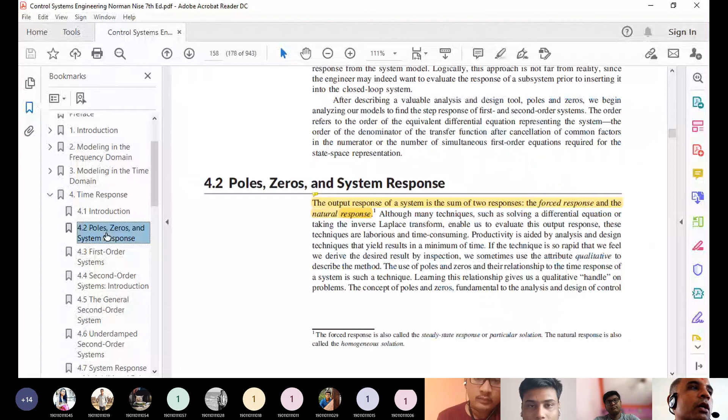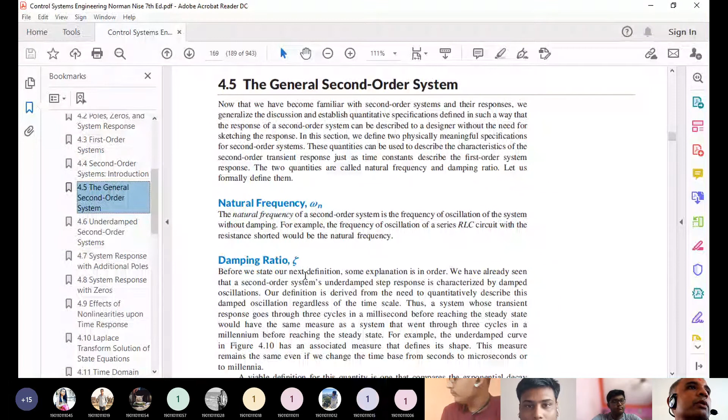Okay. So in the first internal we ended with the type order of the control system, poles and zeros. So now onwards, in the second mid-sem exam, that is first order system, second order system parameters, that are the natural frequency of oscillation, damping ratio, rise time, peak time, maximum overshoot, settling time, all the parameters. Then underdamped system response, the effect of addition of poles and zeros.

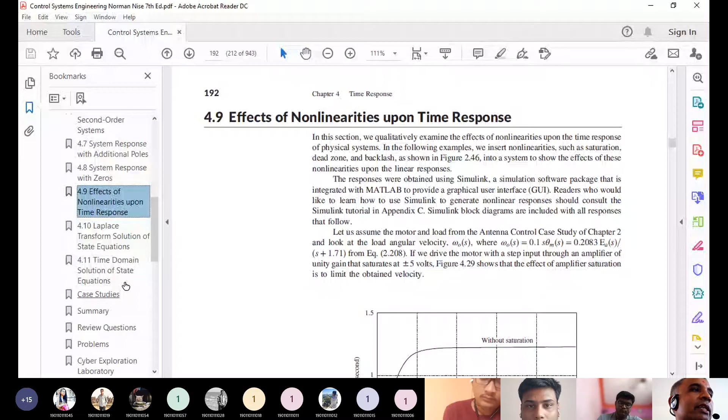Okay, of course 4.9, that is non-linearity, is not covered. The state space equation is still left. So 4.10 and 4.11 are not in your course at present. I hope in laboratory the state space is already covered.

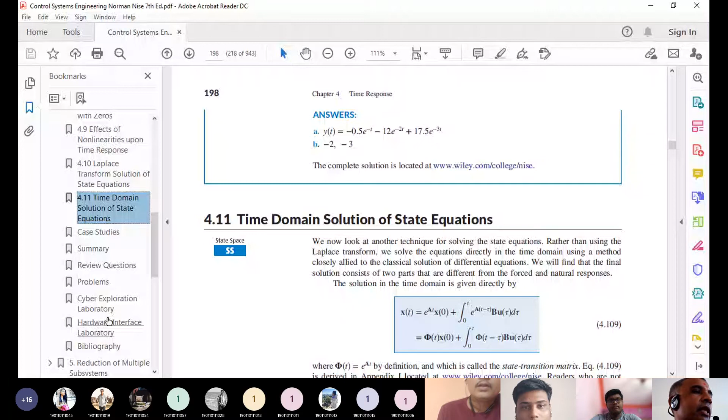So later on we are including these things in internal exams. Then reduction of multiple subsystems, at present we are not covering this part because this is nothing but block diagram reduction. Of course it's very easy. If you go through this chapter you can just do it on your own.

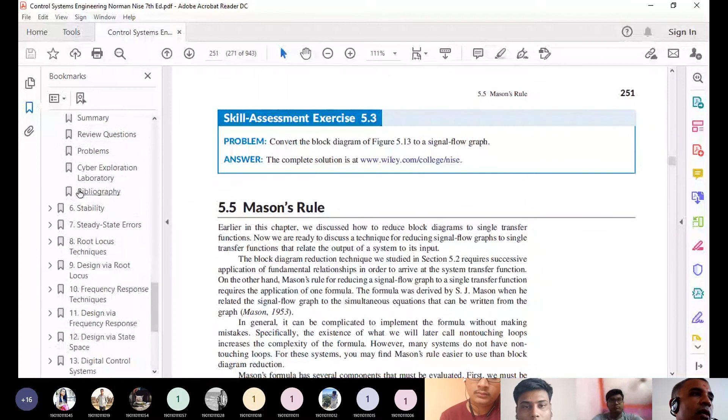Then we completed chapter number 7, that is steady state error. Then we completed chapter number 6, that is stability. So these full 2 chapters. Then the 8th chapter, that is root locus. Then design via root locus. Then the 10th chapter, frequency response analysis, that is the Bode diagram or Bode plot. And the 11th chapter, that is design via frequency response. Okay. So up to this is in your mid semester exam. Okay.

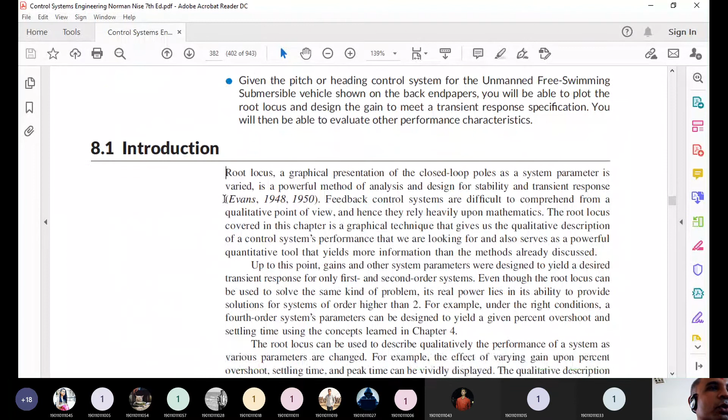So these are our objectives for learning the root locus, and this is the outcome of this root locus topic. Just go through this paragraph. Once again I am joining back, I am here only, I am muting myself for a couple of minutes.

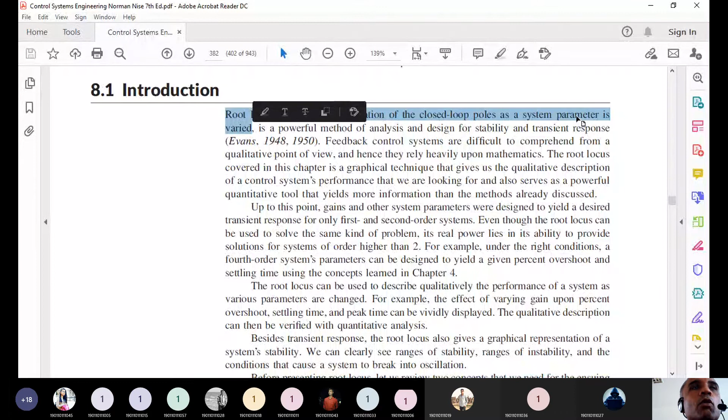So first it is written that root locus is a graphical representation of closed loop poles as a system parameter varies. Closed loop poles means the roots of the characteristic equation, and a system parameter means my gain, the open loop gain.

With this design I can find out the stability as well as the transient response. Transient response means, before my settling time, what are the parameters included - that is rise time, peak time, maximum overshoot, and delay time. So all these parameters I can come to know.

This whole method was developed by Evans in 1948, and later in 1950 it was published. It gives the name root locus, based on the roots of the poles, and 'loci' - actually a different word origin, based on which it is known as locus.

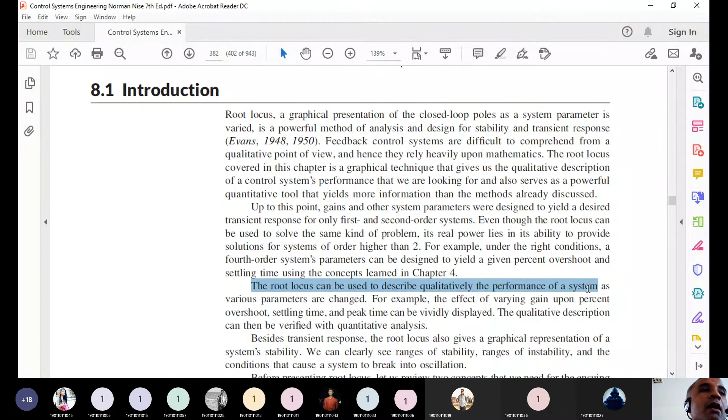So the root locus can be used to describe qualitatively the performance of the system, as various parameters are changed. Now, how can we draw this root locus?

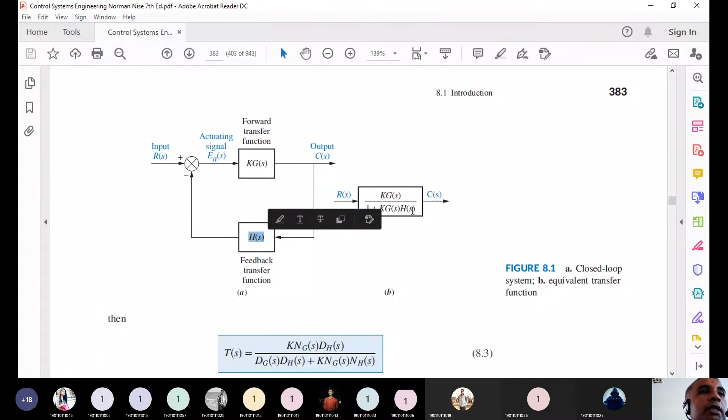Quickly we go through this part. So we have an open loop system transfer function, that is G of s. I am multiplying it with the constant gain K, and H of s is my feedback path transfer function. So my overall transfer function C of s by R of s is K G of s upon 1 plus K G of s H of s.

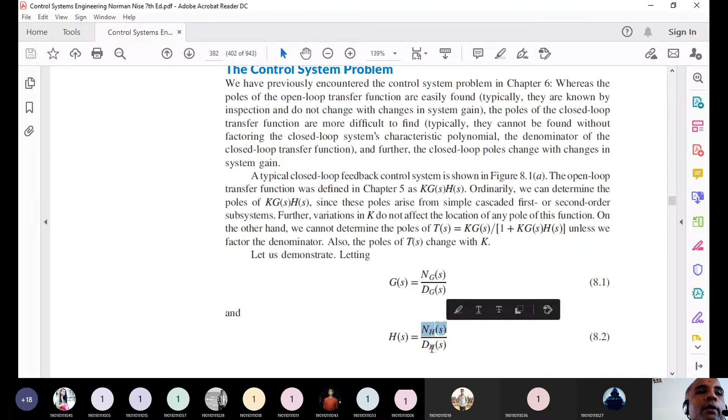Now if I consider G of s, that is equal to the numerator of G of s and denominator of G of s. Same if I have H of s, that is numerator of H of s and denominator of H of s. If I substitute these two in this equation, then I get the overall transfer function C of s by R of s as this. I hope you can find out.

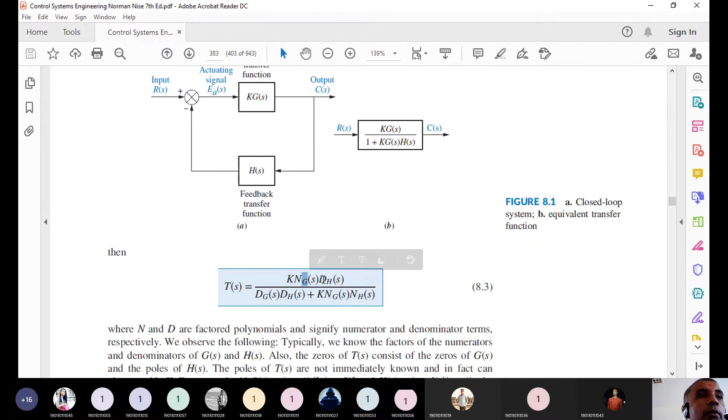Yes, sir. Okay. Understood. So here the capital N shows a numerator, capital D shows a denominator, and the subscript shows a numerator of G. G means forward path. No, denominator of H means denominator of my feedback path.

Okay. Fine. So here also they explain the same things using one example. They consider G of s is s plus 1, denominator s into s plus 2. So my open loop zero is s equal to minus 1. And open loop poles, that is s equal to 0 and s equal to minus 2. I hope everyone understood. Yes, sir. Okay.

See, open loop poles and zeros, that is different than closed loop poles and zeros.

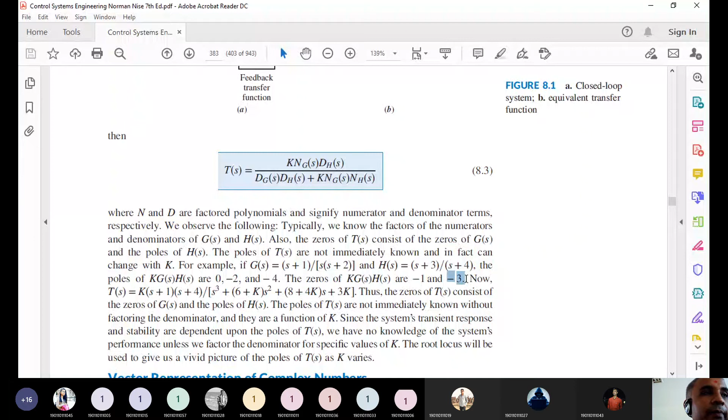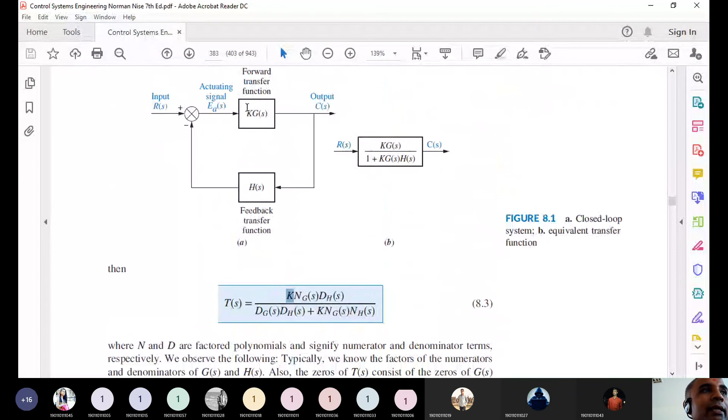Okay. So now here, suppose I am considering k is unknown and that is nothing but gain. I can call that a gain. Where did we multiply it? Forward path transfer function. Okay.

So we can say that poles of transfer functions are not immediately known without factoring the denominator, and they are a function of gain k. Why? Because as the k value changes, the poles of the closed loop transfer function change. Understood? Yes, sir. Once again I am explaining.

Just see. If you want to write down in your copy, write down G of s. Everyone write G of s. S plus 1 divided by s into s plus 2. Write H of s. S plus 3 divided by s plus 4. Now find out the T of s. T of s will come like this. Everyone please write down in your copy.